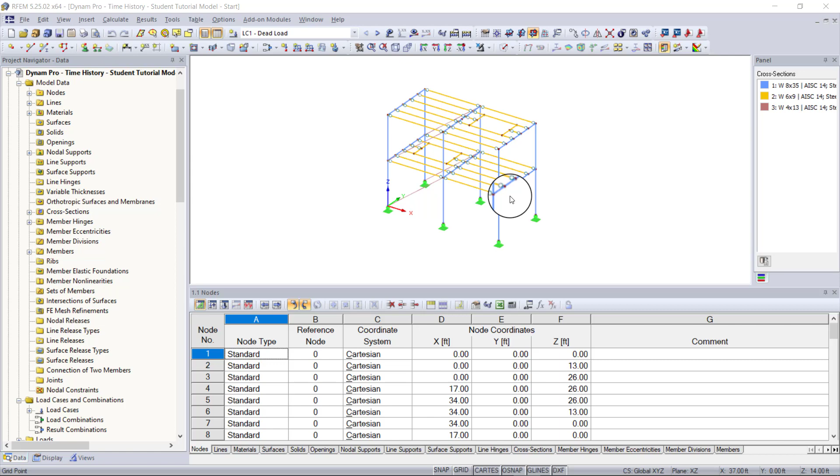So first thing you will see is I have a simple steel frame structure open here. And this is what we are going to be placing our oscillating machine on. And we will be adding in the horizontal and vertical force load cases as well. So now I just want to show you the machine load.

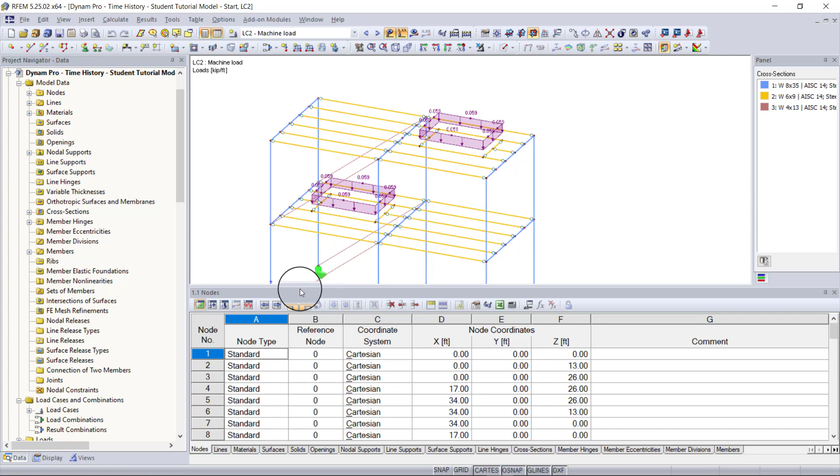Right now we have the dead load open, but if I go to the machine load, you can see where the machine is placed within these openings here. And this is basically just a static force. So now what we need to do is add in the radial forces. So we need to go up here and create a new load case.

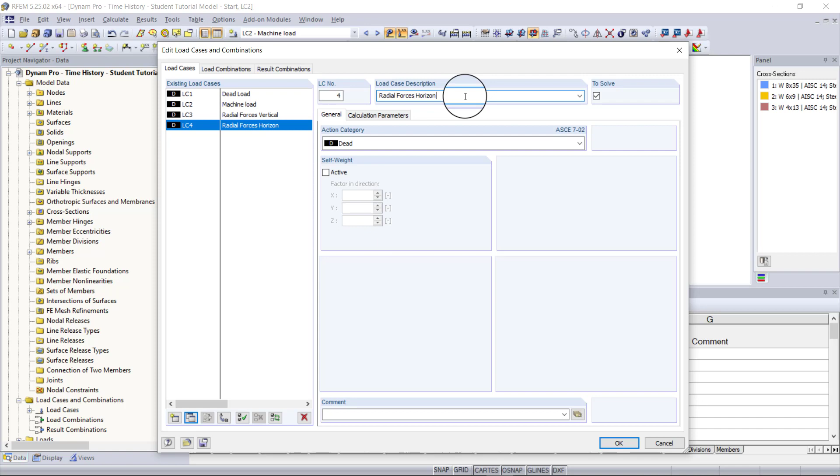The new load case dialog box will pop up, and this first radial force will be our radial forces in the vertical direction. And then we just need to create a copy of this and have a load case specifically for our radial forces in the horizontal direction. So we'll click OK. Now we can create our vertical radial forces.

So what we need to do is go up to new member load. And then we can create our new member load, and this is going to be a force, uniform, and in the z direction. And then we're going to enter a magnitude of 0.05 kip per foot. Click OK. And now we can just add in the forces along the perimeter of this opening where our machine is located.

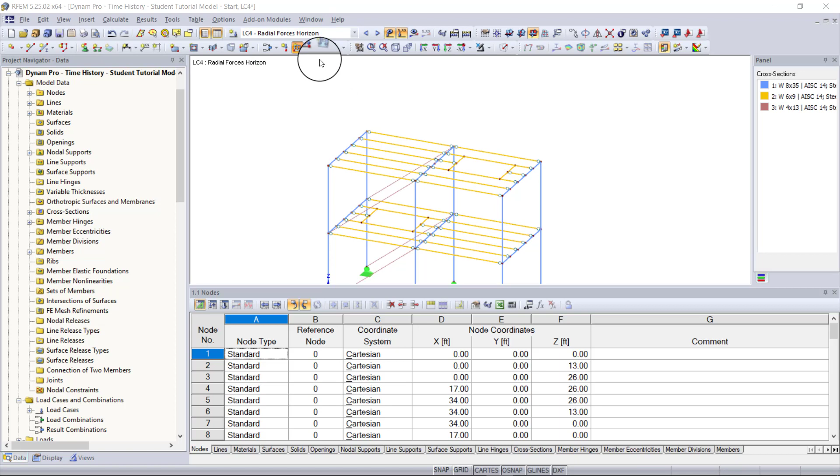And now all we need to do is do the same thing for our horizontal forces. So we'll go to the horizontal load case and create a new member load. And instead of being in the vertical direction, this is going to be in the x direction. And this is going to be the same magnitude, so 0.05 kip per foot.

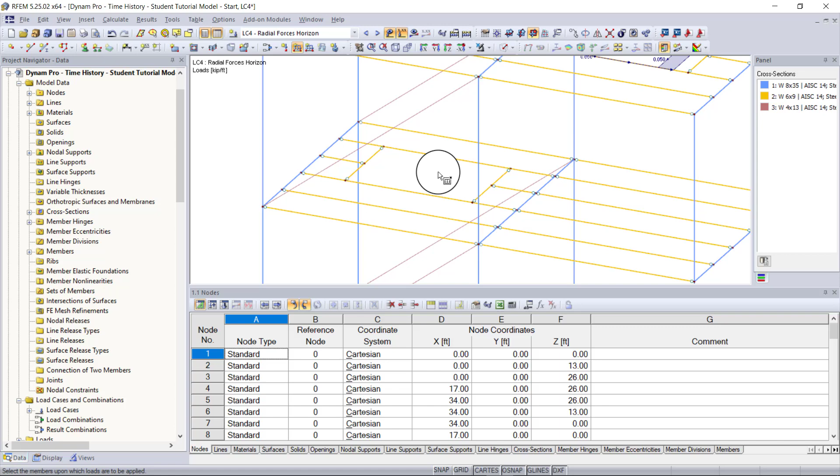And so now we just need to add in this load. And we can do the same thing for our opening down in the bottom here. And now we have both of our horizontal forces and our vertical forces. So now that we have our forces for our machine, we can go into our project navigator on the left-hand side here and go down to add-on modules, and then we can double-click on RF-DYNAM Pro Dynamic Analysis.

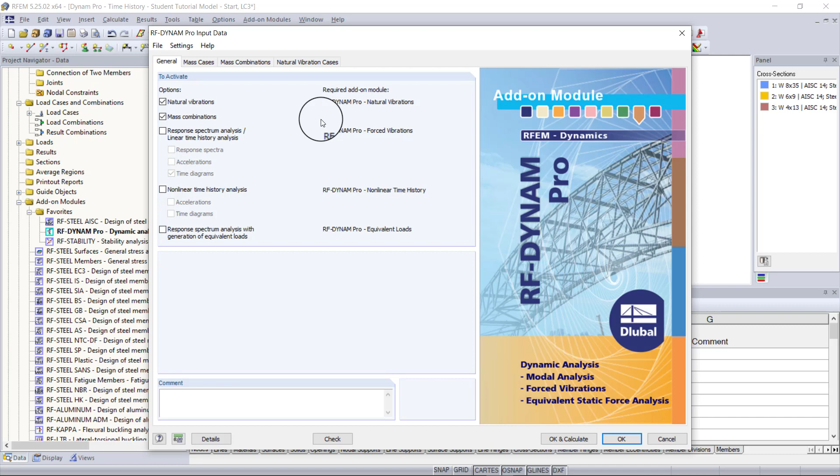So now the first thing we want to do once we have the RF-DYNAM Pro add-on module open is we want to activate natural vibrations and our mass combinations. I recommend going back and watching the tutorial videos on the natural vibrations, and these videos I will link below, and these just explain how to enter the input data and run results for natural vibrations. So a lot of this will make more sense, and I'm just going to briefly go over it now.

So under mass cases, we want to create two mass cases, one for our machine load and one for our dead load. So we'll just make this first mass case our dead load. And since we're already taking self-weight into account in RFEM, we're going to turn off self-weight. And then we're going to check off the option to take the force components from our LC1, our dead load case.

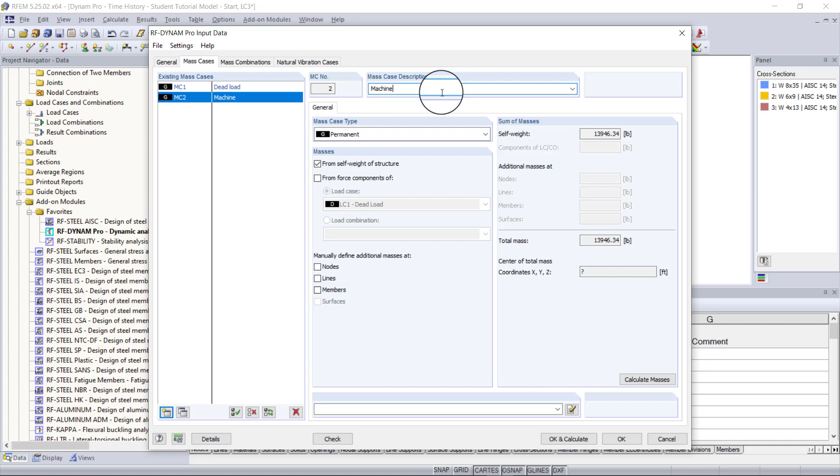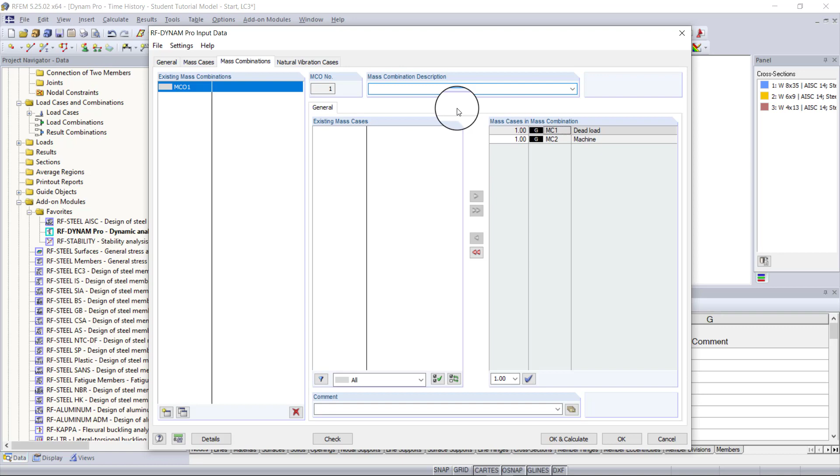And so now all we need to do is just make another mass case, and this one will be for the machine. And we're going to uncheck self-weight of structure and check force components, and then we're going to choose our load case machine. Now under mass combinations, we just want to combine both our dead mass case and our machine mass case. So we can highlight both of these, move them over, and then we can just name this mass case 1 and leave it blank.

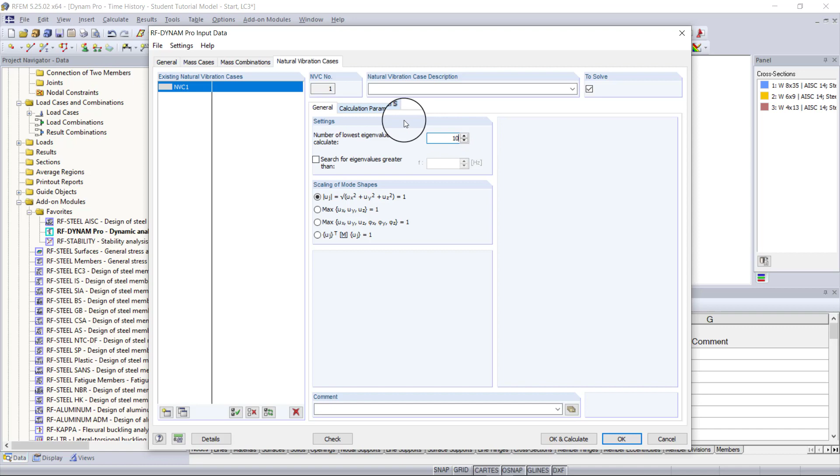Next, under our natural vibrations case tab here, under our general tab, we want to tell the program to run 10 eigenmodes. And then we can leave our scaling of mode shapes equation the same here. Then under calculation parameters, we want to choose the acting masses from our mass combination. And then we are going to keep all three directions activated.

And then we just want to keep our diagonal matrix and translational degrees of freedom. We'll keep the method for solving our eigenvalues as default, as the Lanczos solver. And then we don't want to take any stiffness modifications into consideration. So now what we need to do is hit OK and calculate.

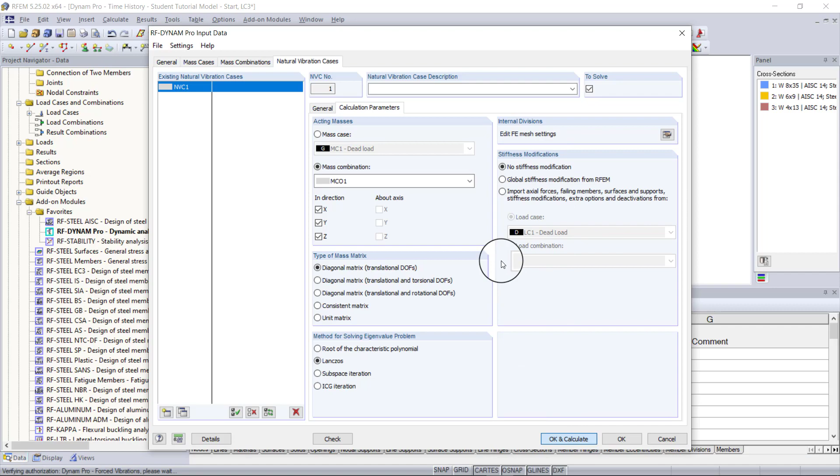And now back in RFEM, we can take a look at our results. So we want to go into table 5 and take a look at our effective modal mass factors and scroll down. And you can see that we have our total mass participation of 99% in the y direction and 69% in the x direction and 31% in the z direction.

Now it's not necessary to get 90% mass participation in each direction, so we don't really need to worry about that. We do need to find the modes with the greatest results in the x direction and the z direction because these are the directions of our loading. So if we go into the x column here, you can see that mode 7 is one of our most important mode shapes, and then in the z column you can see that mode 10 is our other most important mode shape.

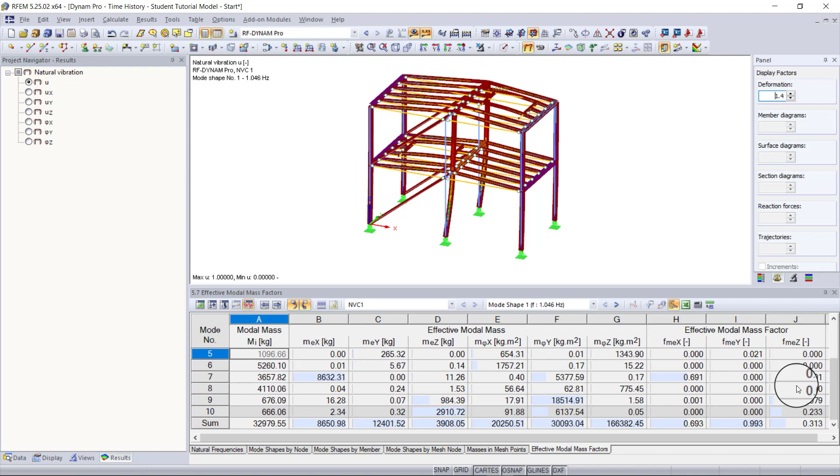And now we want to take a look at our natural frequencies as well. So we can see that our maximum natural frequency in mode 10 is about 37 radians per second. And now we can go back into the RF-DYNAM Pro module and activate our response spectrum analysis or linear time history analysis module, forced vibrations, and then we would just want to activate our time diagrams.

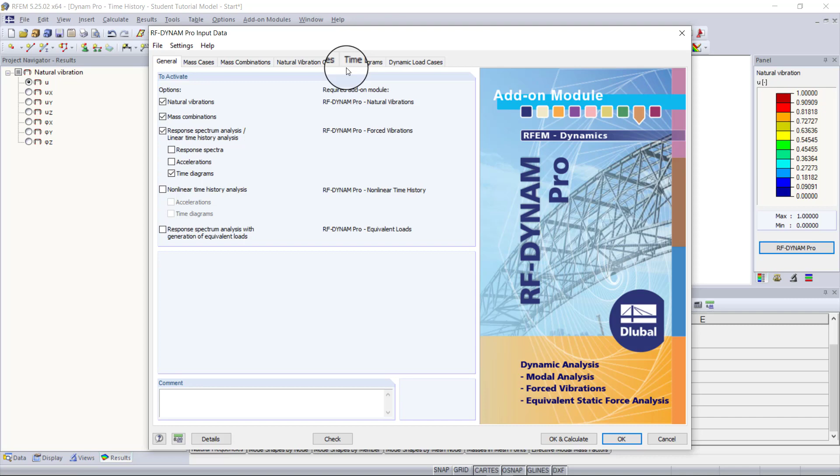So once I do that, you'll see a couple tabs will appear, and in the time diagram tab, you will see a couple options listed here. So our options are either transient, periodic, or function. So transient is only for a linear time diagram, and so you have to enter your time steps manually, so in seconds and then the multiplier. And you can import and export this from Excel.

Then periodic is the option we'll be using for today. And then a function, as you may guess, is you can enter a function and you can have it calculate your time steps for you based on the function and the step size you choose along with the maximum time.

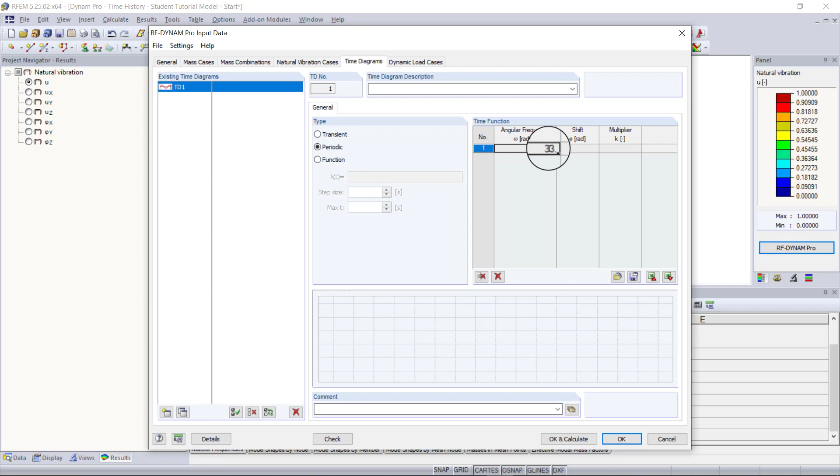So like I said, we're going to be using periodic, and under this option, we want to enter our angular frequency of the machine. And for this example today, we're going to assume that our machine runs at 5.33 hertz or 33.51 radians per second. For the shift, we're going to keep this as 0. And then for the multiplier, we're going to keep this as 1.

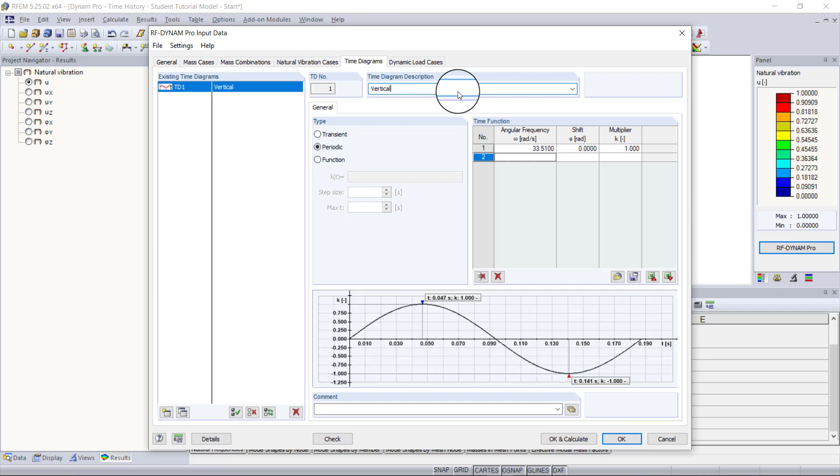And then once I hit enter, you'll see that the program creates a sine function based on the angular frequency entered. And for this time diagram, this is going to be our vertical component. And so at time 0, there will be 0 forces. And then at time 0.047 seconds, we will have the full force of our loading, so 1. And so this will keep going based on this sine curve.

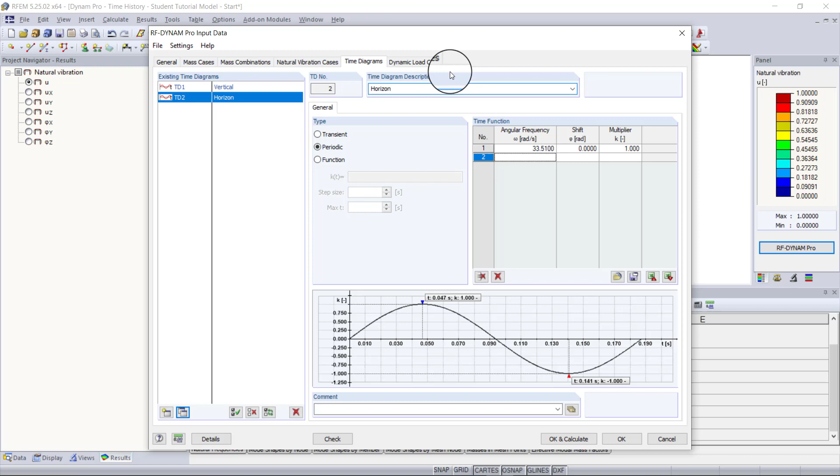So now we have to enter a time diagram that's similar but not the same, so we want to make one copy of this. And this time diagram is going to be for our horizontal components. We'll keep it as periodic, and then all we need to do is shift this time diagram by a value of half of pi, so this equals 1.5708. If I hit enter, now you'll see that our time diagram has shifted.

And now at time 0, we have full force of a multiplier of 1. And then at time 0.047 seconds, we have no force at all. And so this is how we're going to simulate the radial forces from our machine that's oscillating, with our two vertical and horizontal components here.

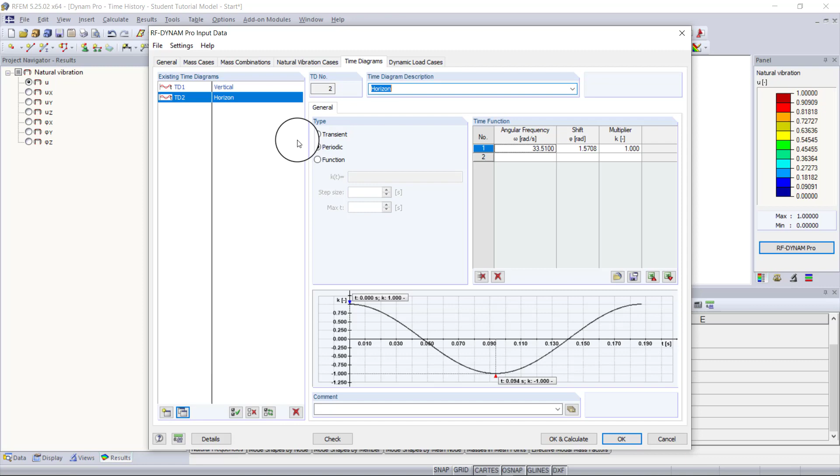So now what we have to do is combine our time diagram with the loads. So we need to go to our dynamic load cases tab, and you can see we only have the time history analysis of time diagrams activated here, because the only module that we activated under our General tab is time diagrams. So everything else will be grayed out.

And then we're going to be using the linear implicit Newmark analysis, and this is recommended in most cases because it provides more precise and better results, whereas the linear modal analysis should only really be used for small structures like a cantilever, for example.

So then under the next tab, time history analysis, here we have to combine the load cases with the time diagram. So for our first load case here, we're going to choose our vertical radial forces, and then we're going to match that up with our vertical time diagram. And then for the second load case, we're going to choose radial forces horizontal, and we're going to match that up with our horizontal time diagram.

When it comes to time steps and maximum time, this we want to change to something smaller, from 0.1 seconds to something like 0.01 seconds. And you want to think of this kind of like FE mesh, because you'll see later how this can affect the accuracy of your results. And then the next thing we want to enter is our maximum time, and we'll enter 15 seconds for this.

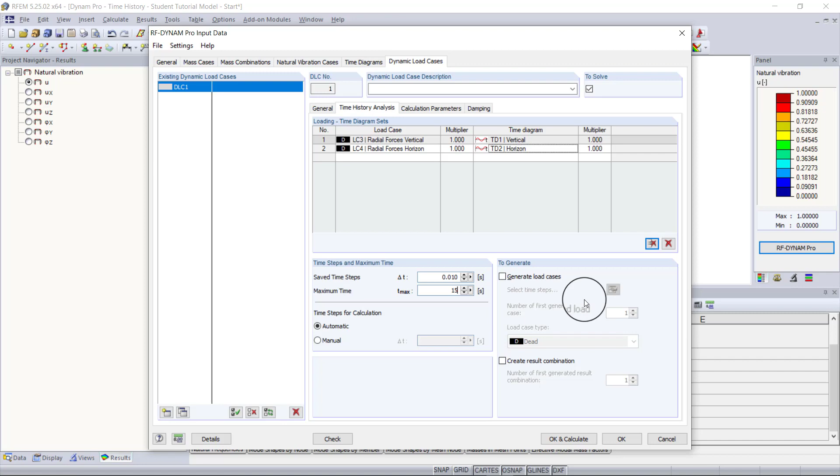You can then use the generate settings over here to generate load cases and result combinations. We don't need this right now, but if you wanted to see the results later and combine them with other static loads so you can do some design work, you can do that here. And this is just something that is handy if you wanted to mix static loads with the loads generated from this time diagram. The next tab we want to go into is our calculation parameters.

And so here we want to do the same input process just like our natural vibrations analysis. This is because the linear implicit Newmark analysis does not use our natural vibrations case 1 that we created. And you can see if I go back to general that this option to choose it is grayed out. But if we chose the linear modal analysis, we could choose this from here. So under calculation parameters we need to basically just set the same parameters as we did for our natural vibrations case 1.

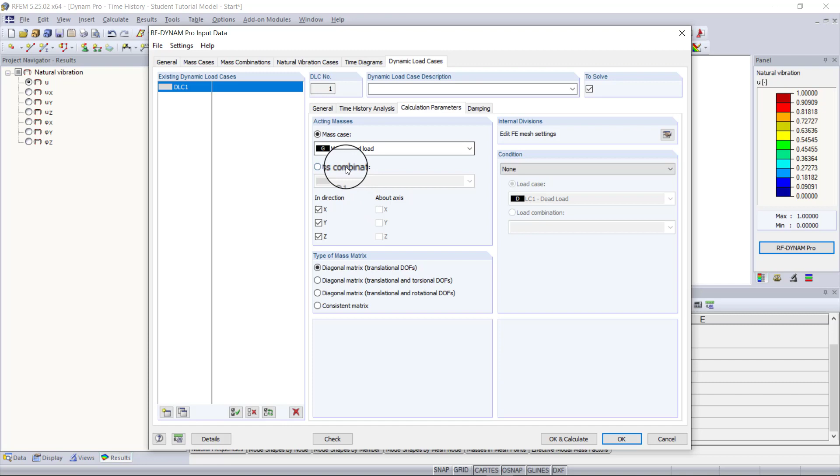And so we can choose our mass combination and we can choose in all directions. And then our type of mass matrix will just be in the translational degrees of freedom. Then when it comes to the condition, we're not going to use any conditions. Then the last tab we need to go through is damping. So this is the last major setting that we need to look at. And what we need to do here is just enter our damping coefficients for Rayleigh damping.

We can't use Lehr's damping for our Newmark analysis. And so what we can do is go into this tool here that converts Lehr's damping into Rayleigh damping. And this is the reason why we ran our natural vibrations analysis, because we needed to find the dominant mode shapes and take the natural frequencies from these. So we can click on this small tool here and we can enter our frequencies from the most important mode shapes, which were 7 and 10.

So 7 was for the X direction and that was 33.67 radians per second. And then since we're using a steel structure, we'll just assume that for steel, the damping coefficient is going to be 0.02, or 2%. And then our other mode shape was in the Z direction, and that was mode shape 10. And we had a frequency of 37.02 radians per second. And then again, we're just going to enter 0.02 for our damping coefficient.

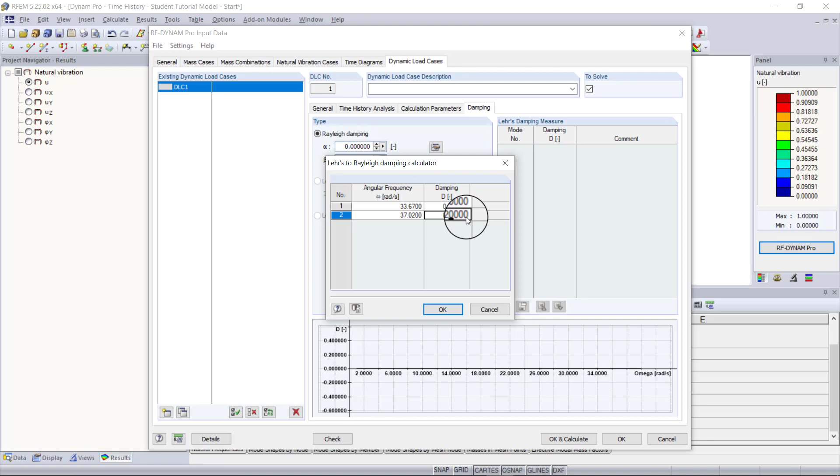So now we can click OK, and you can see that our coefficients, alpha and beta for Rayleigh damping, were calculated automatically. And then you'll see the function will appear down below, and those dominant frequencies we entered are damped by a factor of 2%. So now that was the last piece of data that we needed to enter to complete the input data for our linear time history analysis. So now all we need to do is hit OK and calculate. And then we will see the results.

And this is the end of part 1.